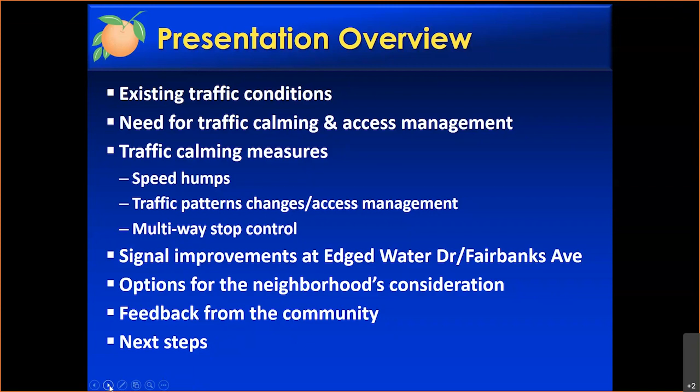Last but not least, what are the next steps? Let's talk about Biltmore Shores subdivision. It is accessed via Edgewater Drive, with two side streets, Joan Place and Sherrington Road. Joan Place is to the south, and Sherrington Road is closer to the intersection. You also have access via Fairbanks Avenue and Shorecrest Drive, and Coronado Road, with Shorecrest Drive closer to the intersection and Coronado Road a bit to the west.

I have some maps to present this information. The traffic circulation within your subdivision just conforms to a residential grid pattern, so there's nothing different or special about it. It's just the way it is—you have your homes, your roads, and access to your residence through the grid pattern.

For traffic control, stop signs are used, usually at the minor streets. For instance, Shorecrest is considered a major road, so whatever connects to Shorecrest, like Sherrington Road, will be a side street with a stop control. The roads are paved, 20 feet wide, one lane in each direction, meaning you can travel both ways.

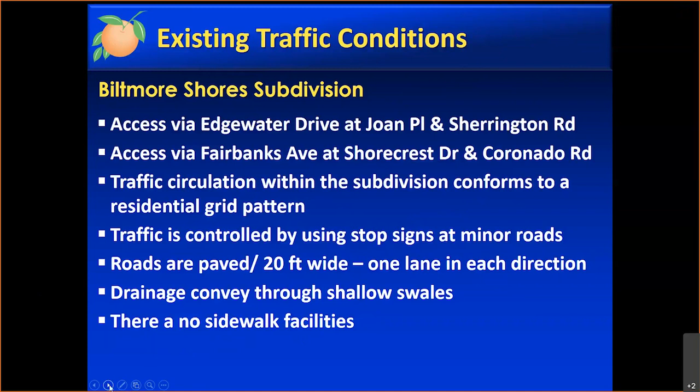Looking at the aerial, let me use my laser pointer. You have Edgewater to the west, the intersection of Edgewater and Fairbanks, and then Fairbanks. Both of these roads belong to the DOT. As I mentioned, Edgewater carries 25,000 vehicles per day. This is a 5-lane section, meaning two lanes in each direction plus a center lane that's a two-way left-turn lane.

A similar thing is happening on Fairbanks, which is also 5 lanes. So the majority of traffic, if they want to connect from one to the next, will have to come to the signal, which in my opinion needs improvements—additional signal timing as well as queuing for the left and right turning movements. Let me go to the next slide, which shows a much better picture.

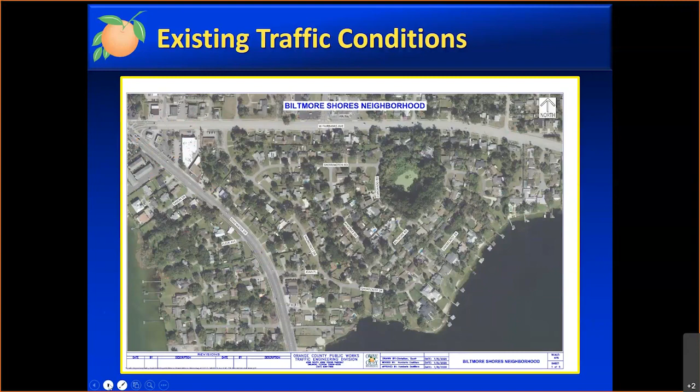So here you are, this is a little bit more clear. On Edgewater, you have Joan Place. This is the first entrance if you're traveling northbound.

Let me also mention that you have several critical origins and destinations near your neighborhood regarding schools. South of your neighborhood, you have Morning Star School, St. Charles Borromeo Catholic School, Bishop Moore Catholic High School, Edgewater High School, and Lee Middle School. It might not be the buses taking kids to school, but if someone is driving and kids live within the neighborhood, they might be more inclined to go through your neighborhood.

So your first access through the neighborhood without going through the signal is Joan Place if you're traveling northbound. If you miss that entrance, you can go to Sherrington, and continue all the way to Coronado, then to Fairbanks. From Joan Place, you can go on Shorecrest, then to Biltmore, connect to Coronado, and vice versa. If you're traveling westbound on Fairbanks, you can enter through Coronado and go through Sherrington, or go the opposite way, or go to Shorecrest.

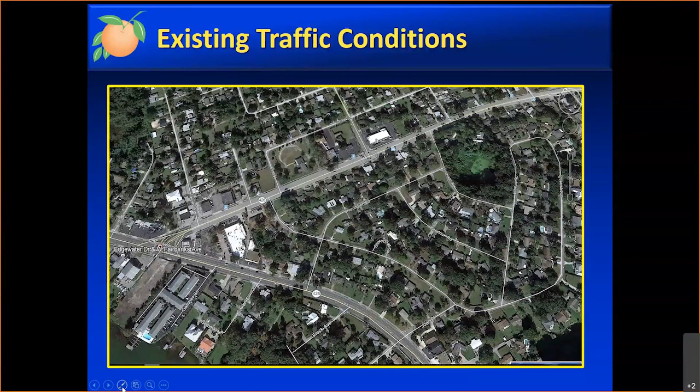So there are 4 access points that people familiar with the community, familiar with your neighborhood, will be able to use to access this entrance and exit to your neighborhood. And so that's why perhaps you might be experiencing some of the speeding, some of the cut-through traffic, and feel a little bit unsafe. Let's continue.

So let's talk about the speed humps. You do have 3, but what is the value of the speed humps, and is this something that you would like to consider? For instance...

Speed humps are appropriate for residential local streets, which you have 3 of. They're usually used on a single lane, either one way, or on a 2-lane, 2-way street, which is the reflection of your roadways. It is appropriate if posted speed limits are 30 miles per hour or less, and it will reduce speeds to 15 to 20 miles per hour.

The typical volume reduction in terms of efficiency is 20%, as observed for cut-through traffic, but you only have 3, so you don't have more to go through the rest of the neighborhood. Still, it is a good option, as emergency vehicles can cross the speed humps safely at low speeds, and there is no discomfort to users while walking or riding over them. So this is a viable alternative that perhaps can be considered.

Okay, let me just, there's something happening with my, okay.

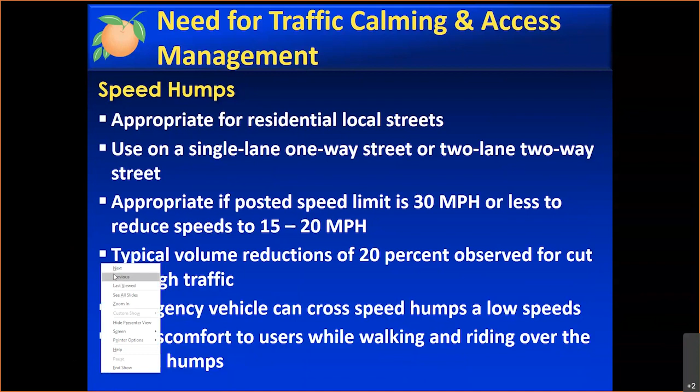All right, so here you have some of your existing speed humps. The one on the left is on Shorecrest. You do have some pavement markings, but they're severely worn out. You can see the speed hump has some cracks and doesn't show contrast with the roadway. It has had a lot of use, and also the signs are missing.

On the right, you have the one on Sherrington. The pavement markings are also worn out - I don't even see them. The signs are missing, and you see some alligator cracks on the roadway.

One of the things we do is that to replace some of the existing speed humps, we usually wait for the resurfacing program. So, Gerald, if you can take a look at the resurfacing program and see where we are in the cycle length - if it's too long before, then we might take action into our own hands and replace them sooner rather than later as part of the whole strategy.

But we know that the pavement markings are worn out, there's no signage, and the speed humps might need to be replaced soon.

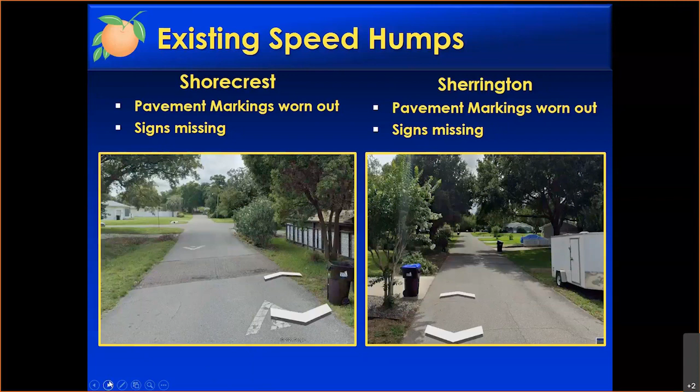So on the next slide, you see the design of a speed hump. On the top, you can see that it spans through the travel lane, crossing both travel lanes, with a span of 12 feet in length and a parabolic shape. It has 3 inches of height at the highest point, and on the bottom figure, the plan view, you can see some pavement markings, which we complement with additional signing as part of the work orders when we are ready to install them. So this is the design that we use.

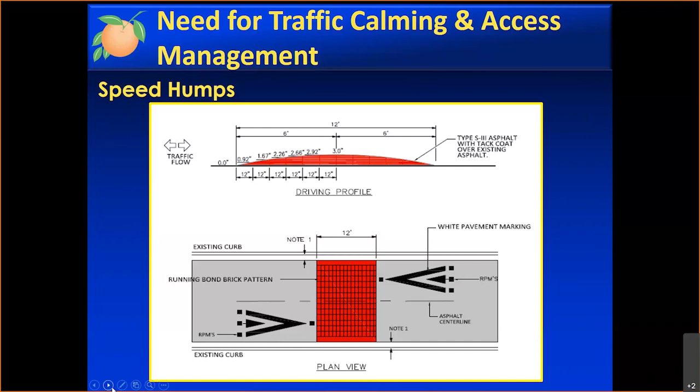There's some color contrast that we have, correct? Well, the color contrast is a terracotta brick color, with reflective striping that shows arrows and gives reflectivity for vehicles approaching at nighttime. So it's not only the asphalt, but there is also color contrast on the speed hump, along with white markings.

So the next options that we have are kind of a combination - we're starting to go a little bit more into shifting some traffic patterns and also restricting some access control. And we will provide you, at the end, after we've gone through all the options, aerials with all the different options that we can consider and talk about. So there is no need to be concerned.

So we have two-way streets, which is what is currently in your neighborhood. The benefit is that it provides convenient traffic flow and management access to residents, but it's also convenient for cut-through traffic use. As long as people can maneuver through your neighborhood and there's a road that connects, they will tend to find their own way. So one of the options we are looking at is perhaps having some one-way streets, but just at specific locations.

It's not going to be through the whole neighborhood, but at the major entrance and exits. So what will this do for you? It will divert traffic to specific entrance and exit points through the neighborhood. This will discourage cut-through traffic, but it will impact access to residents in a certain way. So this is something the neighborhood will have to consider if it's something you're willing to entertain.

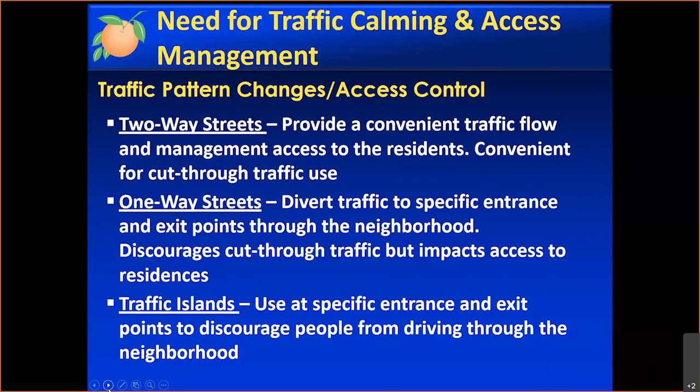This is used at specific entrance and exit points to discourage people from driving through the neighborhood. So we're going to make it very conspicuous and visible with signs, and there's going to be reflective markers. We want to make sure that people who are not familiar with the neighborhood are safe, and that this is not going to be a cause of concern for safety, either for your neighborhood or for people unfamiliar trying to access it.

The other option was the multi-way stop control. I know some of us say, what's the big deal in adding these stop signs? Just go ahead and put the additional two and we're done. But unfortunately, for the use of a multi-way stop control, we need to go through study and analysis, because when they're installed where not warranted, people are going to disregard them. And if we do it in one neighborhood where it's not warranted, it's a slippery slope.

More neighborhoods are going to want it, and the county is going to be liable if there's a crash or accident. So not only do we have to talk about safety and enforceable traffic controls, but we have to make sure there's not a crash that results in a fatality, and that what we install is the right traffic control at the right location, vetted based on traffic analysis. This can be useful as a safety measure at intersections if certain traffic conditions exist. Safety concerns with multi-way stops include pedestrians, bicyclists, and all road users expecting others to stop. So it has to be at the right place.

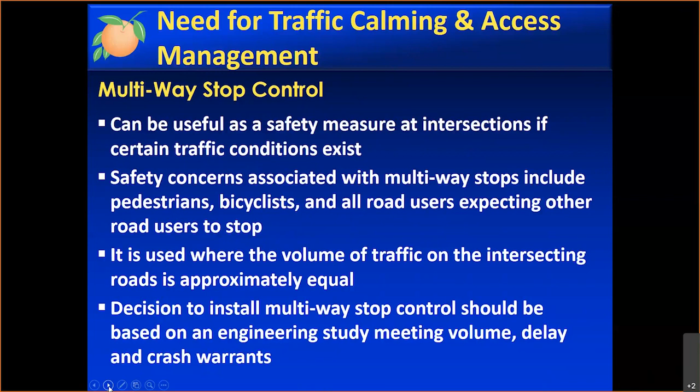So we have to make sure the warrants are met before this is installed. Otherwise, we will look for other options. But certainly, if there are intersections, we can do a warrant analysis and determine whether this is warranted as part of the overall analysis for your neighborhood.

And last but not least, we talk about signal improvements at Edgewater and Fairbanks. Now, this intersection belongs to the DOT, and any major reconstruction, which can cost $500,000 to $1 million depending on the type of improvements, the DOT will definitely have a say. However, we were looking at what we can do in the meantime that is cost-effective, something that doesn't require a lot of reconstruction and that we can do within the existing equipment.

We will have to talk to the DOT, but some of the things we would like to consider and present to you are modifying signal timing to increase the duration for the heavier movements during peak hours, whether you're coming from Edgewater or Fairbanks, just to allocate more time so that instead of being tempted to cut through your neighborhood, people know the signal can carry them through the intersection to their destination.

The other thing is to change the lane designations to facilitate the demand for heavier movements to improve signal efficiency, and I will show you what I mean by that on the next slide.

Then to complement existing detection with advanced detection to reduce delay. Currently, the existing detection is only at the stop bar, so if you're coming from Edgewater trying to make a right turn onto Fairbanks, it's not going to detect that. The advanced detection can detect that.

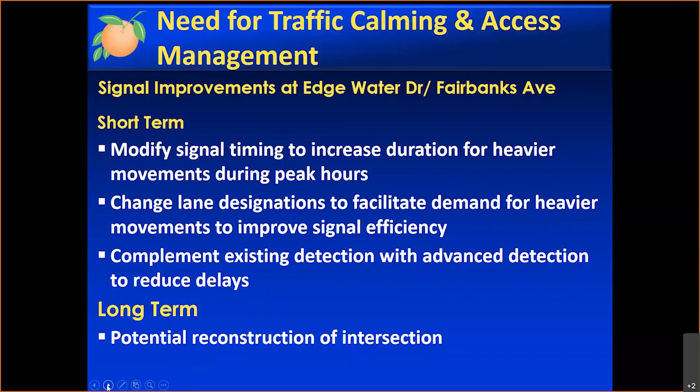So let's take a look at the picture right here. This is Edgewater. Fairbanks is to the right, so there is a left turn to the business. Now this left turn occupies a lot of space, so with the volume that we have for traffic going through, you have two lanes of traffic going through. Unfortunately, if you want to make a right turn, you have a free right turn slip lane, but...

If traffic is backing up, blocking this right turn, it means that already we lost the ability for the traffic. And if you have heavy right turns, that traffic is going to be in queue, and that is not a good option. So maybe talking to the DOT and seeing what we can do with the signal timing, maybe making this a right turn only, or something we can experiment with.

Similar thing for the left turn lane coming from Fairbanks, making a left turn, traveling southbound on Edgewater. So certainly there are some options that we can consider for the existing signal timing. I cannot tell you what it is, but we can establish conversations with the DOT, but wanted to tell you that this is also on the table for discussion.

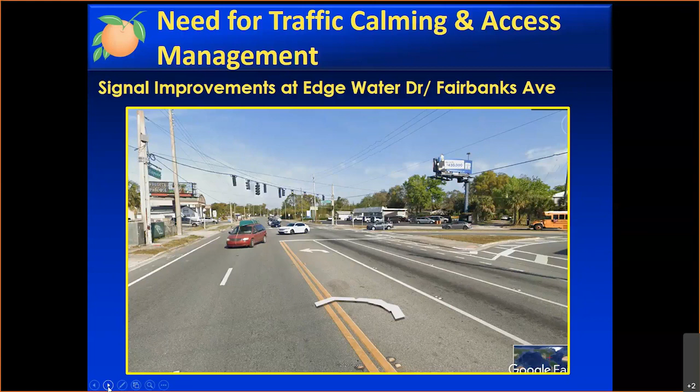So more conversations, we will have to talk to them. We have presented to you four options. Let's just recap, and then we're going to get into the nitty gritty in terms of what we're going to be presenting for you.

So we talked about adding additional speed humps to the ones that you already have. We have talked about looking at changing some of the traffic patterns, perhaps from a two-way to a one-way, and maybe restricting some of the exits or entrances with a physical barrier, having an island that will prevent some of the cut-through traffic.

We also have been talking about some of the multi-way stop control, this is something that we can talk about in terms of where it makes sense, and then last but not least will be some modifications to the signals.

So what we are presenting to you goes from the least restrictive to the most restrictive, and there is going to be a combination in terms of the multiple options that we have. As I was mentioning in the beginning, this is not all or nothing, and we will also talk about the implementation, because we can phase it.

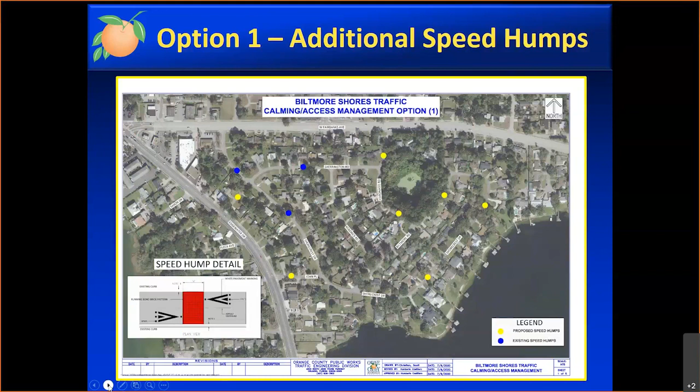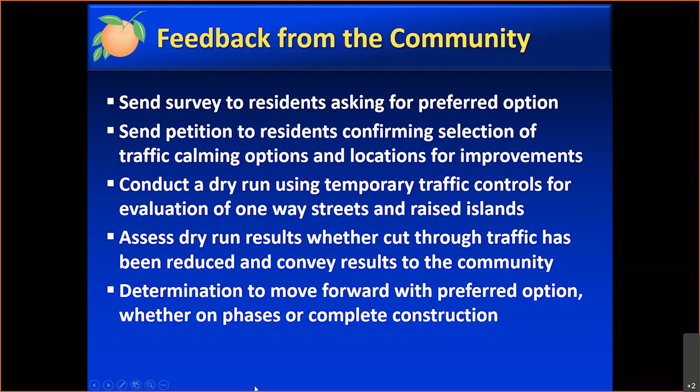And then there's a process we'll have to go through in terms of going to the BCC and the determination going forward regarding installation. We will need to talk about identifying funding sources.

We believe that, depending on which option we choose, the estimated cost can be between $25,000 to $50,000 to $70,000. So there's definitely going to be a cost associated with it. We will submit this information before proceeding with installation. We need to go to the BCC to move forward with construction and funding, and then we will develop a construction schedule.

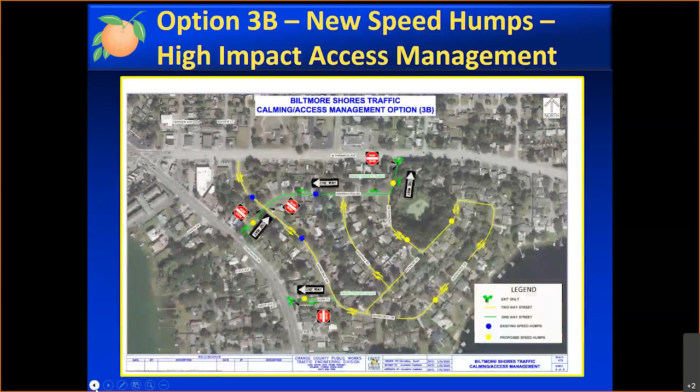A couple of the other questions were suggestions on the one-ways and two-ways. I'm going to read these so they're on the record. For access management option 2A, it was recommended changing Joan Place to the neighborhood entrance and Sherrington to a neighborhood exit only, based on the second most popular cut-through being Edgewater to Sherrington to Coronado. I responded saying they may like option 3B, which is closer to that suggestion.

Someone else asked if the presentation is going to be available to download. This is being recorded, and we'll be able to provide a link to the recording in the materials we send out with these different options, looking for feedback.

Another suggestion on the one-way, two-way is whether it could be considered to switch to two-way traffic on Shorecrest, and Sherrington to one-way, since there are 6 houses impacted. This is something we just came up with to present to you, but we're willing to consider whatever you have as part of your response whenever we send this information out, so we will evaluate it. Yes, absolutely, this could be modified.

Okay, someone did provide the contact information, it said president, so I guess the contact information to maybe the president of the HOA. And someone says, how does this tie into the sidewalk project?

I've been getting questions about that. Well, this kind of came out of the sidewalk project because I was getting a lot of feedback of people who wanted sidewalks. I think there was one person who didn't want sidewalks, and then the sidewalk project was canceled due to funding. So trying to find a resolution to what the base problem was, which was traffic calming and safety, I reached out to Humberto to see if he could put together a study and see what other options there are. But I will let Humberto respond to where we may or may not be with the sidewalk project.

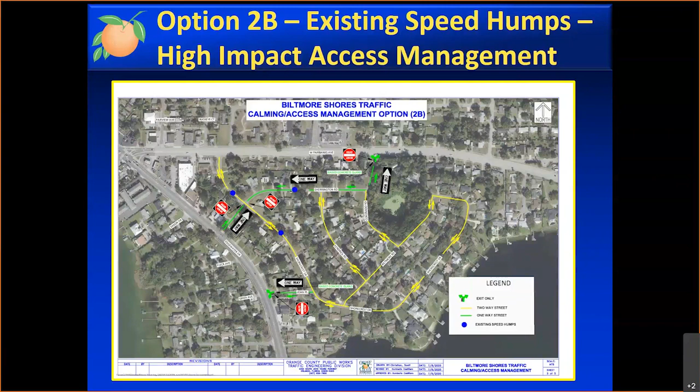Oh, absolutely. You can send the questions to me. Is my email address on there? Yes, it is part of the presentation. So myself or Humberto, we will field any of the questions and get those responses back to you. Humberto, could you change the screen to the slide with the contact information?

Sorry, I was talking and I was muted again. Paige, do you have any more questions? No, I suspect that we're probably going to rally the troops, ask some questions, and probably give Humberto a call to kind of talk through a couple of things, if that's okay?

Yes, you can call me, but your main point of contact will be Gerald Marks, because he is the project manager and he will be the one implementing this. Certainly you can call me anytime, but for faster results in terms of the actual implementation, it will be Gerald Marks. Perfect. Thank you. Sure, you're welcome.